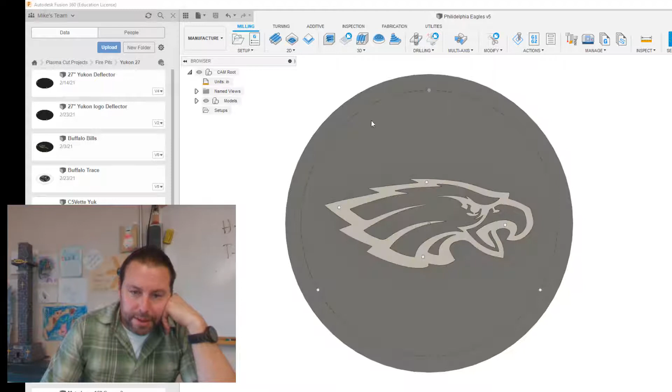Everybody, today I'd like to talk about Fusion 360 and its templates for their CAM function. Lately I've been doing a lot of repetitive work, cutting designs out of 16 gauge steel on my Langmuir Crossfire Pro, and I was looking for a way to streamline things, so I ran across the templates function within Fusion 360.

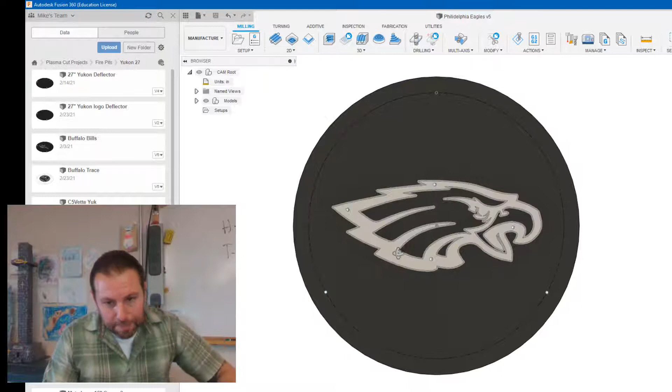So it's pretty cool. If I go and want to cut something like this, it's just some wall art on two pieces, held together with some standoffs.

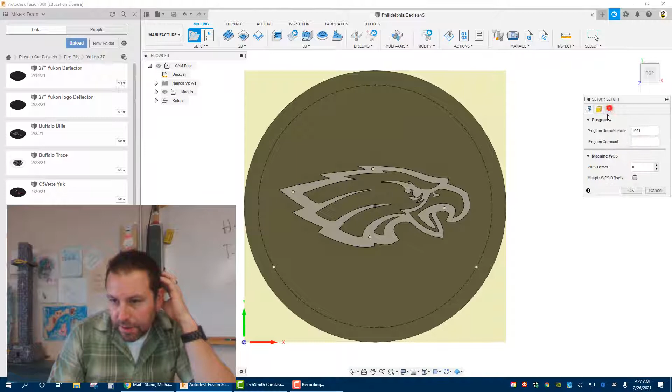What we're going to do is create your typical setup, how you would normally do it. For my Langmuir, what I basically do is set my work coordinate center off to there, set this to cutting, pick the model I want to use. No additional stock, keep it as is, give it a name. That's the name.

Then I'll also create a setup for the top piece I'm going to cut out. I select that as my model, change my box point, my work coordinate center, cutting also, no additional stock. There's pretty much no way around this setup - this is the legwork you've got to do in the beginning regardless.

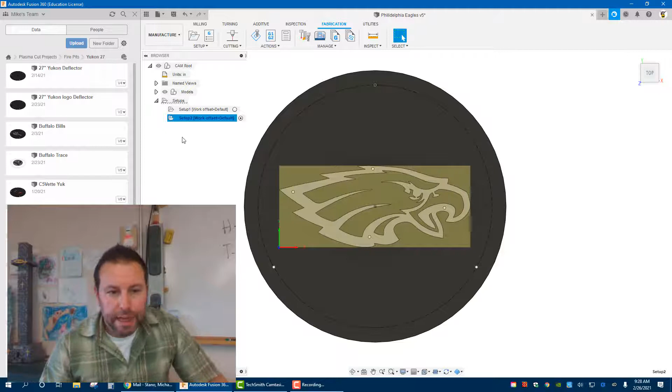So now once I have this set up, normally you would go in, click it, go to cutting. I'm always constantly using either 16 gauge or 14 gauge steel, so I would come in, select the same tool I'm using, go to my library, get my plasma cutter - that's all been set up.

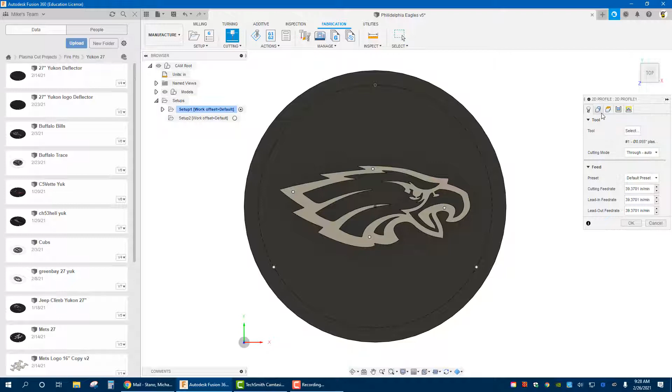Then I have to go in, change my feed rates for the 16 gauge steel, select my geometry, adjust my tolerances - usually 0.001 to 0.005 - click smoothing on, go change my lead-in, lead-out, all this. I'd have to do this multiple times, and if I'm doing lots of designs repetitively over and over, it gets tedious and annoying. It's easy, it's just the same thing over and over.

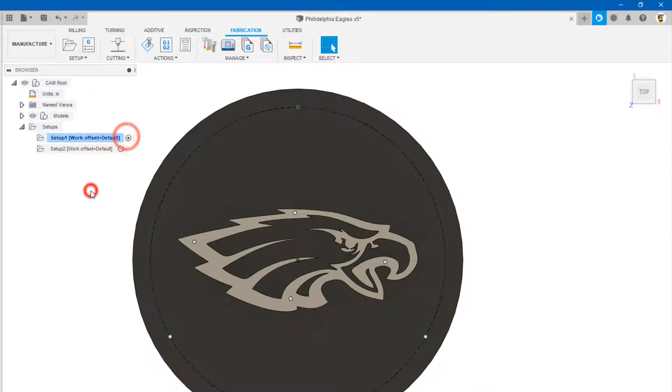So instead, what I decided is that you can create a template. The beauty of a template is that once I'm in my setup, I right click, go create from template, plasma operations, 16 gauge, click it. Now when I hit the drop down up here, I have two different ones that I normally use.

The first one is usually for finer detail with a little bit more hard edges. I don't need that for this first operation, so I'll delete it - that's one click. Now I'll edit this, and we can see my feed rates are all set up, tool already selected. I just need to select the geometry I'm using. My tolerances, compensation type, smoothing, lead-in radius and sweep angles - all done. I hit OK, done, it's generated.

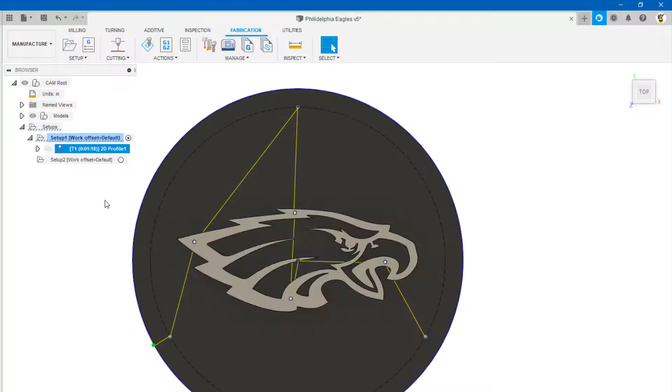Now for this one, it's just as easy. I go in, right click, create from template, 16 gauge, and I know I probably won't need that first one, but I'll keep it just in case. I go to edit, select my geometry, hit OK. Takes a second to generate - there you go, all done, created from the template. Now I know I don't need this first one, delete. That's how templates work.

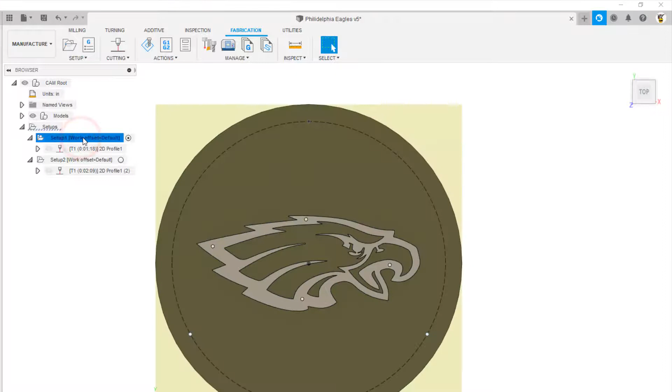I'll show you how I did this and how to do it - it's relatively easy. I'll go back to setup one, go to cutting. The tool's already selected, so you would normally go through your day-to-day typical function: select your tool, change your feed rates if needed, select your contour - none of this needs to change for us.

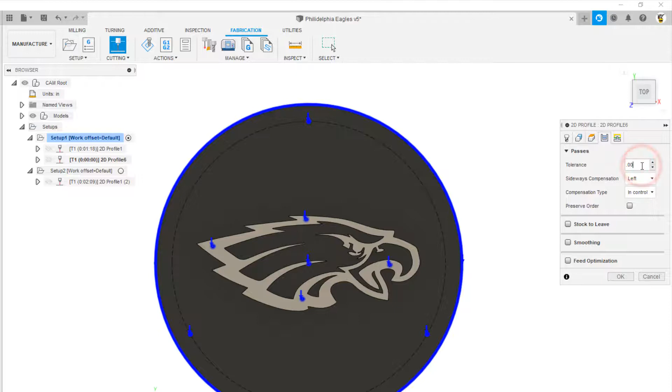Change your tolerance, so I'll do this as if I've never done it before. Smoothing, I'll keep that in. Change my lead-in radius, sweep angle that I like to use, 0, good. Now you hit OK. Entry position I don't normally check, but if you need to, you can.

Now that it generated that operation, I right click onto it and go 'store as template', call it whatever - 2D profile, plasma gauge, 14 gauge operations - choose the location. I do it to the cloud so I always have it, but you can do it locally. Let's say local, select folder, it's going to find it, save. And that's it, that's always there.

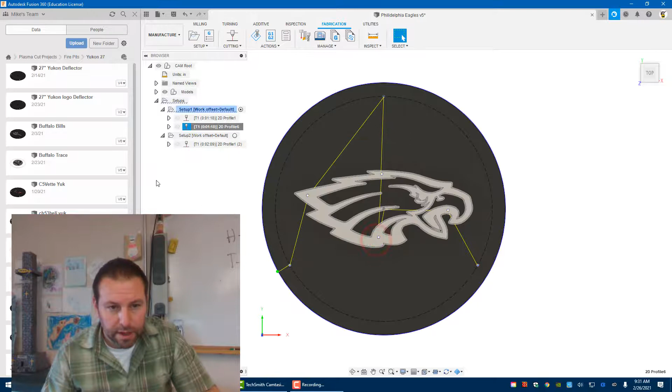Say I wanted to do that for this one - right click, create from template, and there it is. So that's how you use templates. Now if you want to manage the templates, come up here to template library.

Now I know I don't need this one, so I'll delete it for now. But I can go to cloud, and there's that one right there - I gave it a description and it's saved there. So that's how you use templates in Fusion 360.

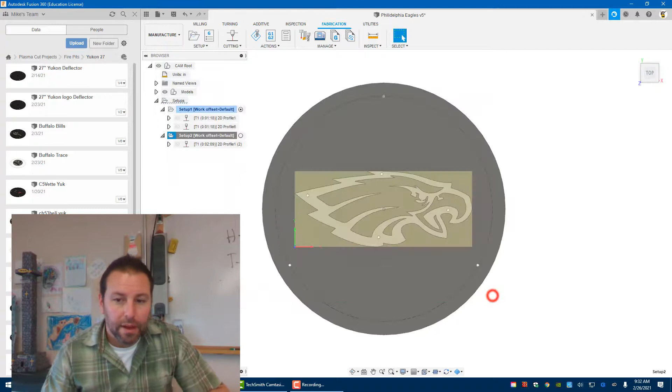I found that it's pretty much made my workflow that much easier and quicker, and less tedious for that set of operations I'm always doing. You could do this for multiple setups - whenever I bring mine in, I have two operations, one for finer detail and one for general patterns. Whatever ones you don't need, you can just ditch out.